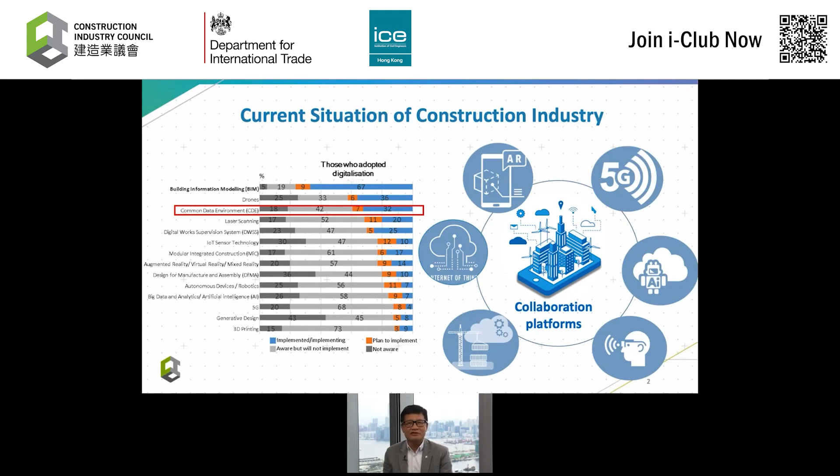The BIM and Technology Adoption Survey has been carried out recently, which shows that nearly half of the construction contracts are already implementing different digitalization tools and solutions. Last year, we set up the task force on construction digitalization to develop the construction digitalization roadmap. It facilitates industry stakeholders to understand the main focuses which set a path leading us to transform the construction industry as the backbone of a smart city.

Last year, CIC and ICE, with the support from DIT, co-organized a webinar on transforming the construction industry through innovations. We invited Sam Stacey, the Challenge Director, Transforming Construction at Innovate UK, to share with us his insight into how accelerating the development and commercialization of digital and manufacturing technologies can support a more efficient, highly skilled, and productive construction industry. The webinar received an overwhelming response from the industry.

This year, we keep our momentum on knowledge sharing, and also we collaborate again to organize today's webinar. In this webinar, we have invited Neil Thompson, Head of Construction Innovation Hub Program for the Center for Digital Built Britain and Director of Digital at Atkins, to deliver a keynote speech on the modern methods of construction and digital transformation in the UK construction industry.

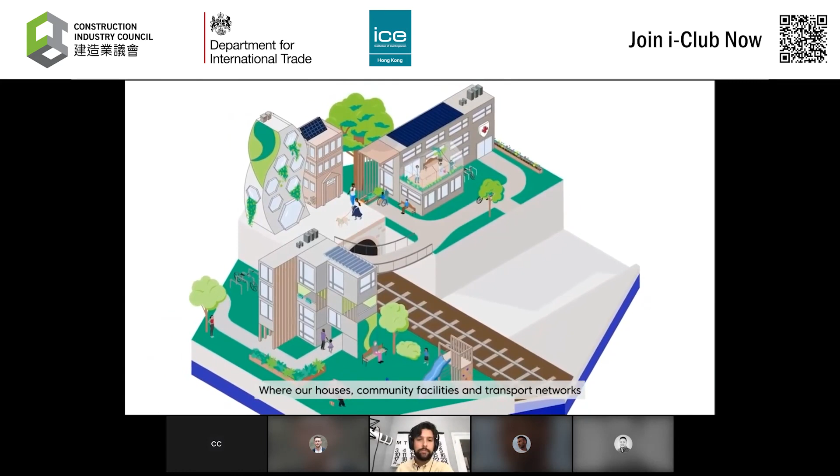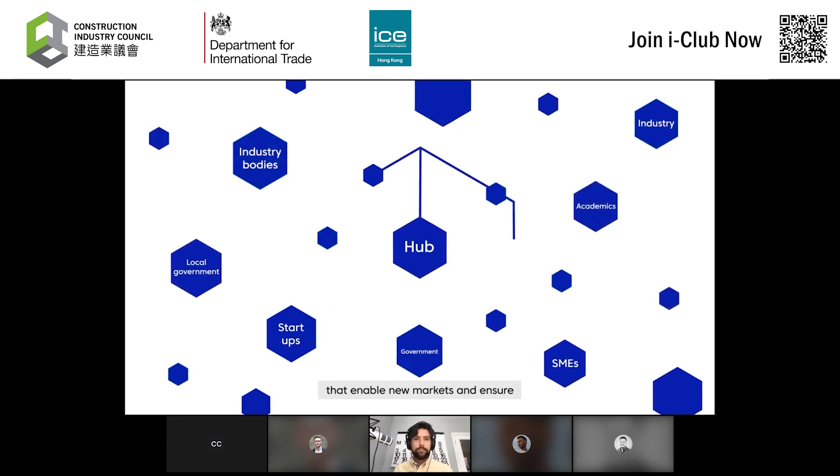The Construction Innovation Hub's vision is a world where our built environment helps society thrive, where our houses, community facilities and transport networks are more resilient, safer and net zero, and our infrastructure is smarter to perform better for users. In 2018, the Hub began a government-funded programme to transform the performance and productivity of the construction sector. We're working with over 100 partners to develop solutions that enable new markets and ensure our built environment is fit for the future.

Better decisions are driven by the Value Toolkit, a suite of tools and processes aligned with the government's construction playbook that empowers clients to engage with the supply chain about the outcomes they want and make value-based decisions about the right delivery model, commercial strategy and suppliers for projects, programs and portfolios.

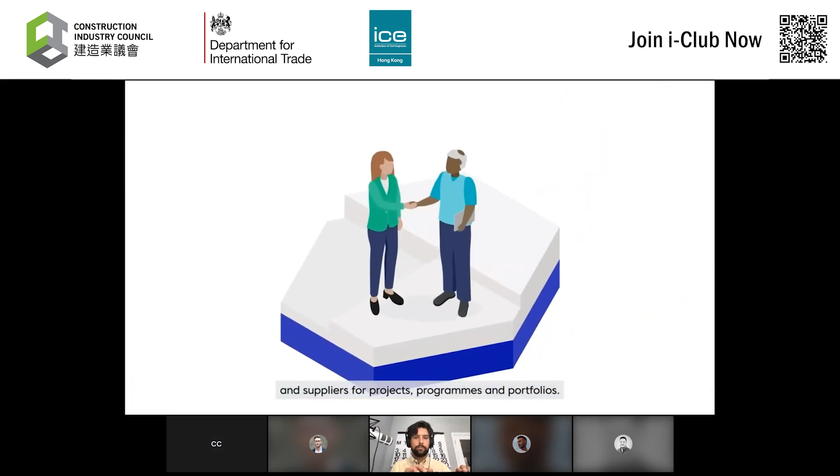The Hub is developing new digital tools and guidance for clients and the supply chain that drive efficiencies and realise the value of data, to help clients get their digital strategy right from the start. Project teams work more closely together, ensure a golden thread of asset information is curated through life, and generate insights from data to monitor and improve asset performance and compliance with evolving regulations.

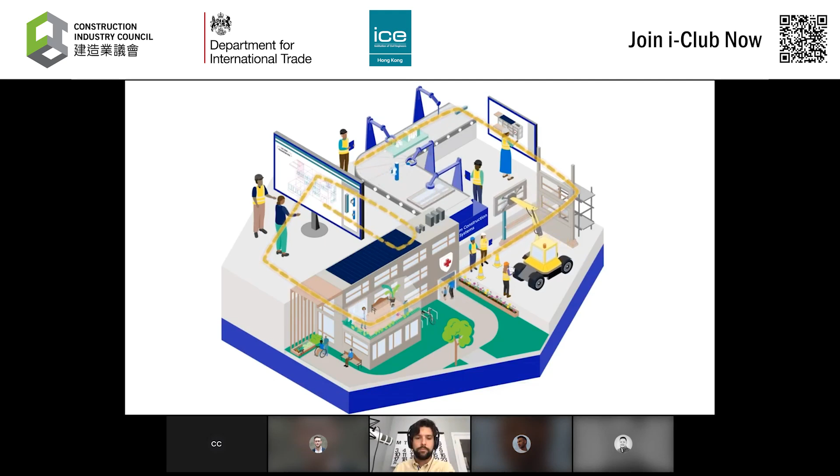We're supporting the next generation of digital twins that can be securely connected across organisational and sectoral boundaries.

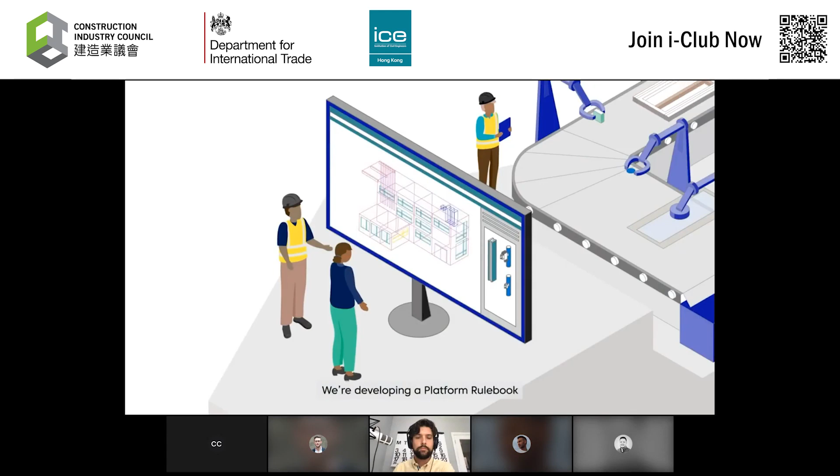The Hub Platform Design Programme is laying the foundation for a thriving UK market for platform construction systems. We're developing a platform rulebook to show how standardised kits of parts can produce a wide range of beautiful, high-performing buildings and spaces, and tools and guidance to ensure components and sub-assemblies are manufactured and assembled using processes that improve performance, safety, and productivity from factory to site.

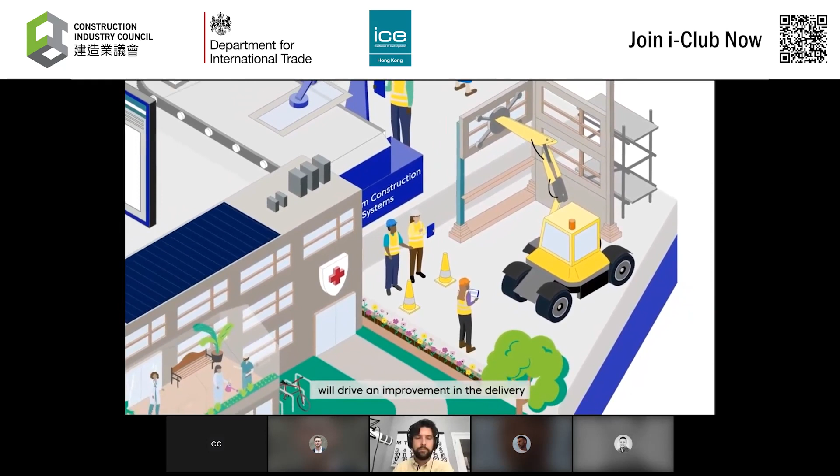Together, the Hub's programme will drive an improvement in the delivery and resilience of our infrastructure and a sustainable future for our construction sector. To grow demand, we have partnered with 5 government departments to identify a pipeline of projects that could be delivered using Hub outputs worth £35 billion over the next 5 years.

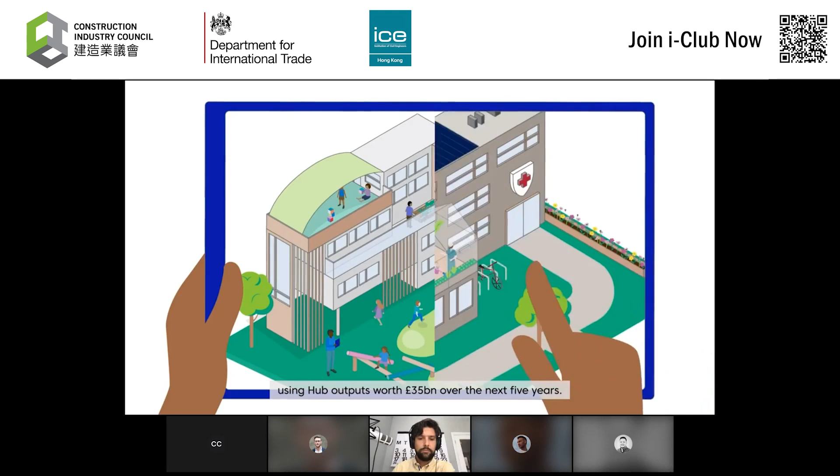Through collective innovation, we are accelerating change. By working together, we will get there faster. The decisions we make today will shape the future. Be part of the transformation.

So there we go, a broad introduction to the work that we do at the Construction Innovation Hub. And specifically, so in there we spoke about a golden thread. The golden thread is a stream that I lead, and that stream is all about creating a safe, sustainable and performing industry. There's some key things in terms of what that enables, and almost most critically is about...

The technical challenge for hitting net zero trajectories. We all have to work together to work out how our industry can contribute to the reduction of the impacts of climate change. And within that, it's also about assuring those products to ensure that the products are fit for purpose inside the supply chain, and we understand the performance of those.

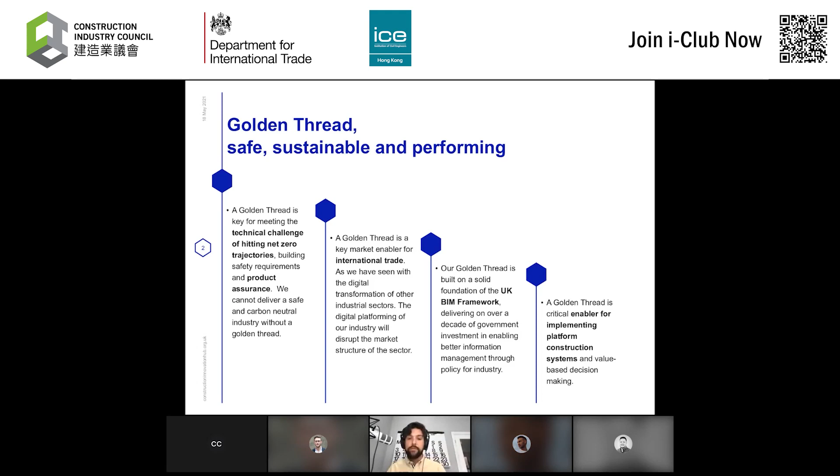So a little bit deeper into my work. Not going to go fully into this. I'm very happy to answer questions on this in the Q&A session, but the golden thread stream is about 6 work streams. One is around safety and assurance. How can we get and generate tools that enable people to generate data around the products, data around the organizational objectives, and connecting those together.

And that was about standards. So in the UK, we have the UK BIM framework, and how do we drive the adoption of that in industry? There's a stream around developing client maturity, so that's where we host working groups with key client organizations and industry to get them together to benchmark where they are today and map their journey to a coordinated and integrated digital future.

Also got this project around government soft landings. What that means is providing the tools to procurement teams that want to buy better outcomes for buildings from a carbon perspective, ensuring that the carbon emissions designed for the building are the carbon emissions that are actually happening when you switch this building on.

Next is the work we do with Cambridge University around digital twin demonstrators. We've run a series of demonstrators where we've connected certain types of asset to sensors and the internet, looking at the insights we get from buildings to bridges, and using satellite technology to track asset performance.

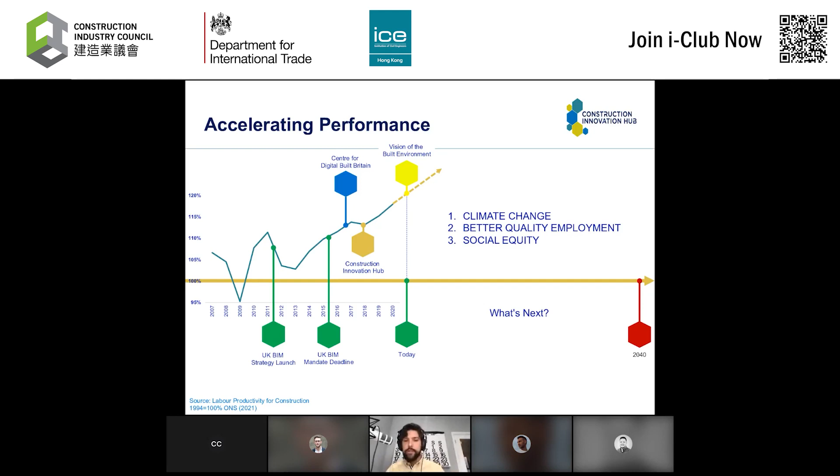But how are we going to go about doing that from a megatrends perspective? We're going to hear later on about the outcomes of these dynamics. We'll talk about the economics of technology, where the cost of storage, compute, and connecting data is reaching very low levels. That has enabled the cost of prediction to become very cheap. And on top of that, especially for our sectors, the cost of robotics has also reduced dramatically.

All these things coming together mean we have a very interesting opportunity from a construction innovation perspective. The input costs have reached a point where we can experiment in a risk-free way from a commercial perspective, but it also drives a business case and a business model that enables the use of these technologies.

But there are consequences. If we think about digital innovation in finance, for example, when we think about what's happening with Bitcoin, it's reached a point where Bitcoin itself is using as much electricity generation resources as a small country, but still a country, and it raises some questions. Just because the dynamics of technology mean we can do certain things, should we? How do we broaden the lens of innovation to include the outcomes of that?

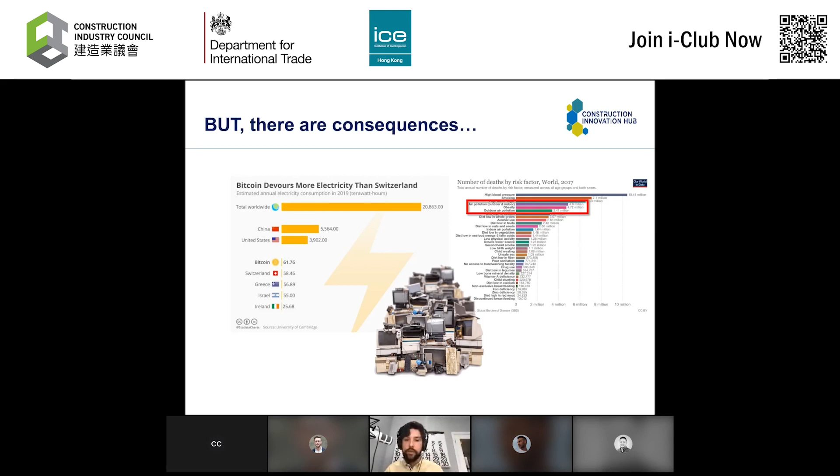If I'm asking you to give me the cheapest thing, then maybe I wouldn't worry so much about quality, about its running cost, about its impact on the environment. But if I'm asking you for the best thing, then you start thinking about the long-term impacts of this—what is the reputation aspect of the thing I'm delivering, what is the quality, and so on. I think the digital transformation that's driven consumer behaviors in retail will map over as we think about the tools presented next. These are going to be the tools that enable people to ask questions about being the best, not being the cheapest.

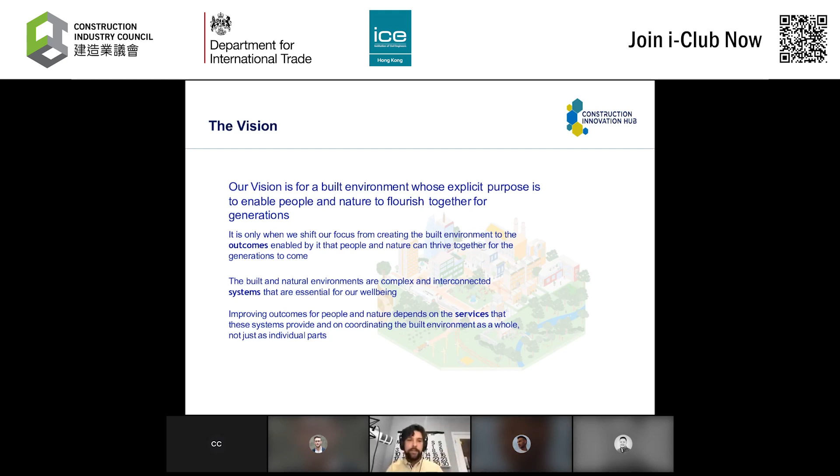We are serving a mode of transport. We are serving modes of well-being. We're serving modes of playing sports and modes of education, etc. And sharing these visions is key.

Now, key enablers of that are new skills and capability and more collaborative ways of working. We've seen the impact of the pandemic, how much digital tools have helped us change quickly to being locked down, for example. Sharing processes and information is really key, because information is locked in silos, locked in places where we can't gain the insight to create better quality decision making. It has to be done in partnerships, and those partnerships have to be across government, industry, academia, and ultimately the people that are going to use this, the people who will experience this every day, whose lives it's going to impact—being focused on the outcomes and designing appropriate and collaborative delivery models. This ties to the steps we need to make, and it's not a linear process.

It's cyclic in nature. We have to have that vision, the area of what's going to be the direction that we need to point to, to know that we're making good progress.

That then ties back into the policies that we need to make from a public sector perspective, to then drive strategy of procurement of people that buy construction services, but then also the people that respond to those procurements. The supply chain also needs to align its strategy. And finally, how we make action, and then learn from that, feed into the vision, and then we go back as a feedback loop.

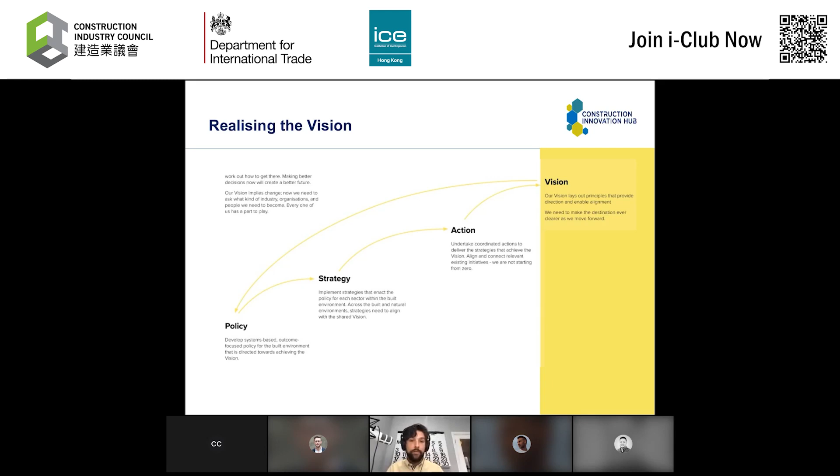And then, lastly, the built environment vision for the UK is available. It's on the internet. If you type in built environment vision UK into your search engine, you'll find it, or we'll share a link and get it to you. But this is what it's all about.

It's about connecting our built environment systems with the natural systems and ensuring that there is balance with those, and we're protecting nature and supporting what we need to do from the reduction of carbon emissions, for example, and those being wrapped together into services that enable us to deliver on the UN Sustainable Development Goals. And the vision is a first step to this is what we should be aiming for. Let's do that together.

And lastly, it's about that communication across different stakeholders. So enough of me. I will then hand you over to our speakers that are going to show you technology platforms that are using those dynamics that I presented to you previously and turning it into reality. Thank you.

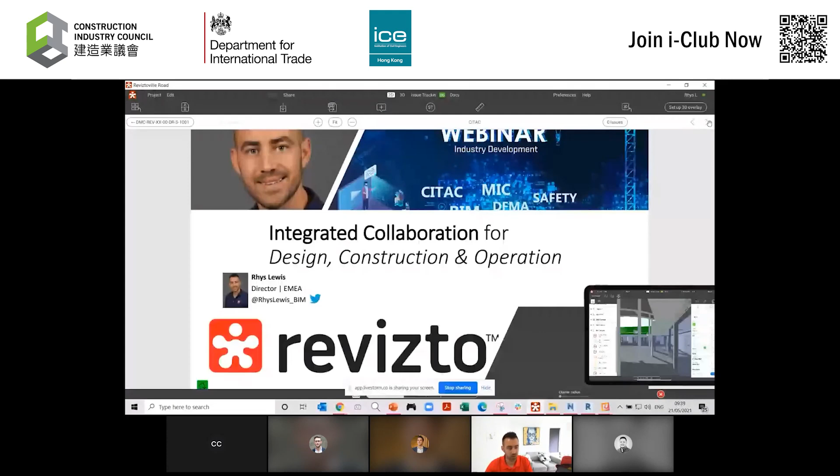So I'm actually in the Revizto application here, as you can see, and I'm just going to run through my slides. So like Neil and others on the call, I've been in industry for a little while now, just over 15 years. My current role is Director at Revizto, and I wear a side hat as well. So I'm involved with the UK BIM Alliance, and I chair the Wales community. And I really joined Revizto after leaving Arup because I saw a really exciting opportunity for us to help industry move forwards. And our goal and vision really was about bringing gaming technology to construction.

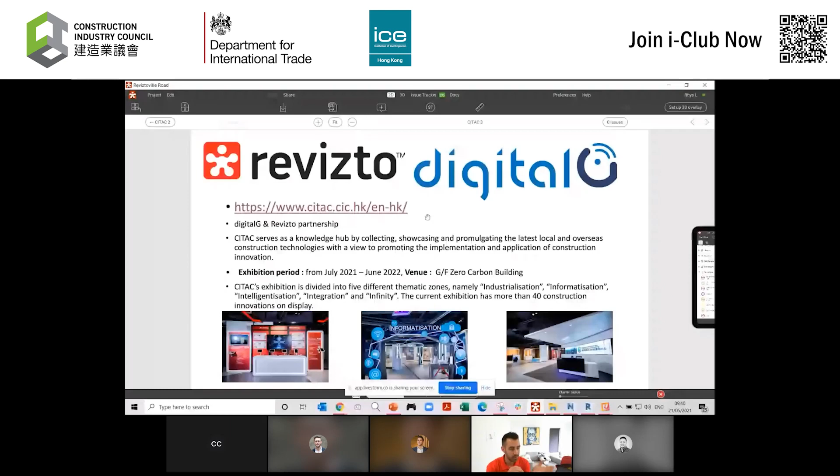Something else we've done that I wanted you all to be aware of: great news actually, we're a pre-approved product now as part of CITAC, working alongside digitalG locally. And I'm not too sure if everyone on this call is aware, but there'll be an exhibition starting as of July, where digitalG will be able to showcase some of the things you'll see today in Revizto. I'm hoping, just like some of the earlier remarks, that I can join you all in person, but if I can't, the team are there and available to talk to you all as well.

To tell you some of the things that many of our clients are doing using Revizto right across the world, actually, this is just a handful of some of the organizations using Revizto. Neil is working for Atkins and a number of other hats as well. So they're using Revizto on a number of different projects globally, Gammon Construction and many, many others. And you'll see why in a short while.

Really, and just one of the points that Neil touched on about engaging and sharing information with all stakeholders, that really is what we're trying to do: to break down the barriers, move away from the silos in communication across construction projects, and ideally have an integrated collaboration platform throughout the whole project life cycle.

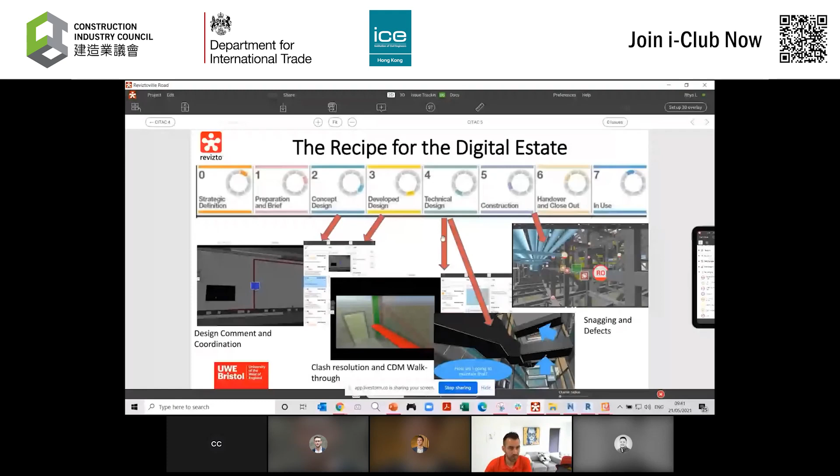So effectively, we end up with a digital estate that the asset owner can use, operate, and really take ownership of. Something that benefits everybody across the whole project life cycle.

So two things for me, really, as we jump into the technology: how can it be successful? My opinion is interoperability and usability. One of the things here I'm looking at is the many file formats and authoring tools that Revizto supports, including lots of popular authoring tools and standard industry exchange formats.

So if I actually jump into the 3D space here, we'll move from 2D to 3D, and this takes me to my home view. I'm actually in the Revizto application now, using my laptop, but I've got the same project and the same application on my tablet as well.

So that accessibility piece, what I'm saying there is anybody needs to be able to pick up the project to be able to communicate, which is what we're talking about today. I'll come back to the tablet in a little bit.

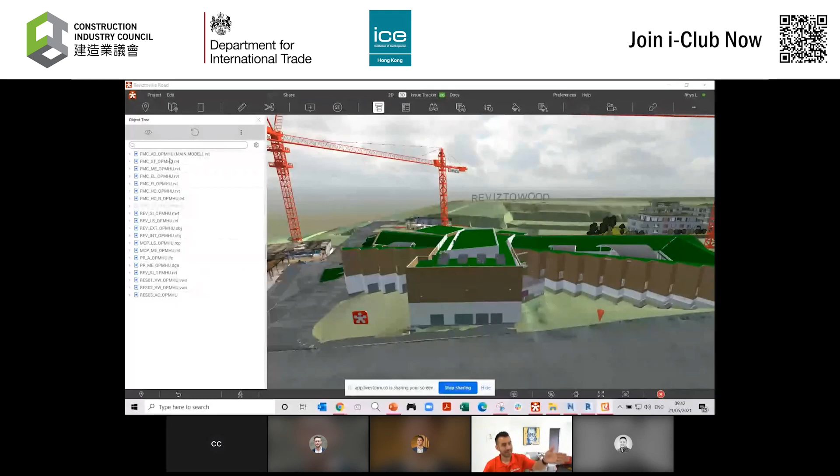Interoperability: on the left-hand side here in our object tree, we can start to see there are lots of different file formats. So we have Revit files here, we also have point clouds, we've got our 2D documentation, DGN, you name it - there's pretty much everything you can imagine here.

But if I just take a look over here and click on that wall teleport, let's just double click and see what we've got here. We've got an IFC, and within there, I just cut a section through. I believe if I just hover over any one of these objects, it'll start to give me the metadata associated with that object. All of this is from MicroStation.

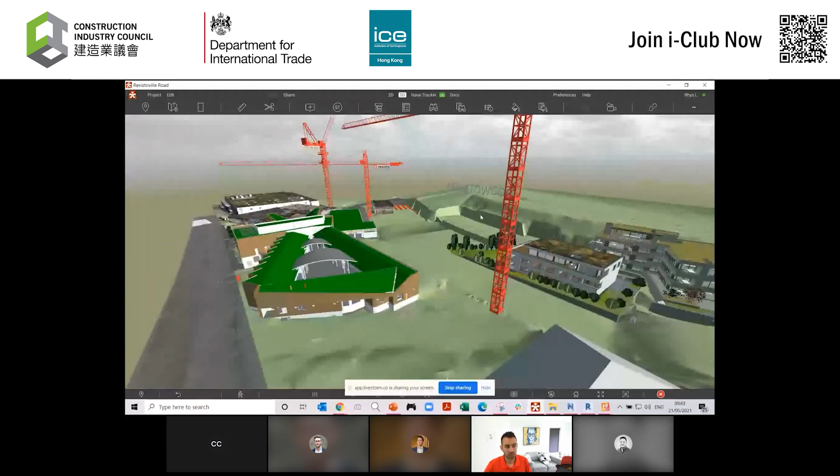So being able to firstly understand and give that information to anybody is very important. The second thing is being able to use that. So using gaming controls, I can really start to navigate through this project and start to ask questions to the project team about a variety of things. I'll come back to that in a little bit.

So we've moved from 2D to 3D. Let's jump to our issue tracker, where I've got a number of preset views here. Our issue tracker really is the core of Revizto. So I can start to filter and search a little bit like a Google search engine, shall we say, to find what I want quickly and easily, so I can start to make smarter decisions sooner.

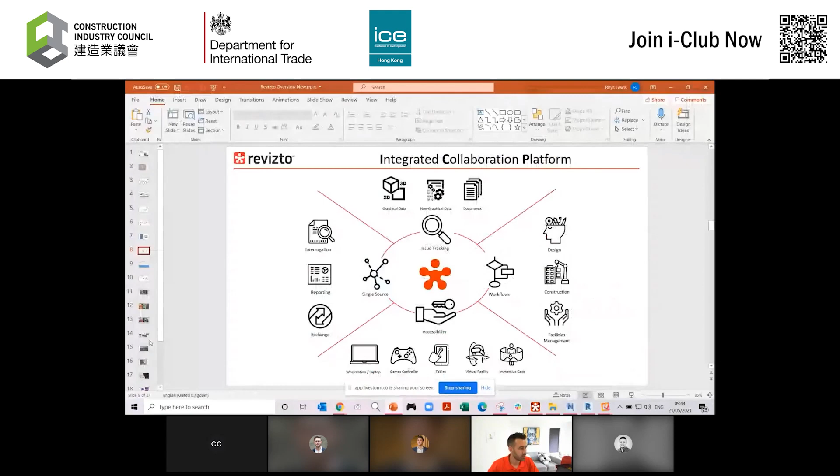So there are just over 4,000 issues here on our demo project. On the left-hand side, I've got some preset views where we've got a variety of various types of issues that we see our clients use. Coming back to one of the previous slides that I had here, this one is quite a good one - issues, I like to refer to these as activities, construction logs. There's a wide variety of use cases we're seeing our customers use Revizto for.

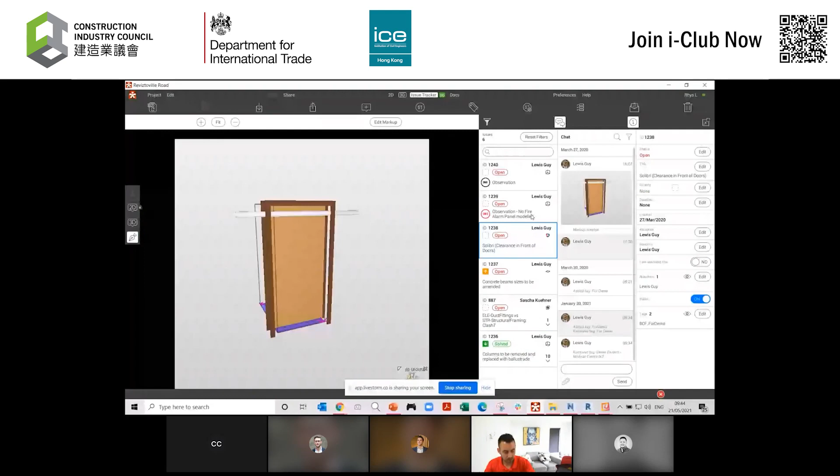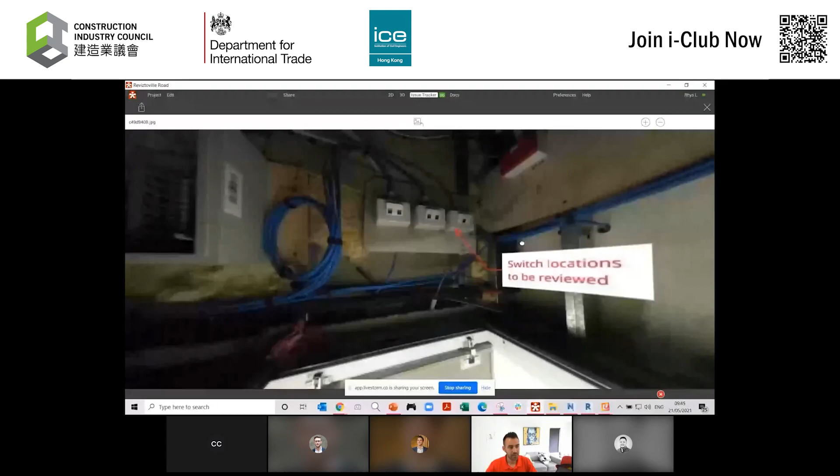So 2D review, you can do all of that in Revizto. 3D review, we can do that here as well. We've also brought in our clashes from a variety of clash detection tools - here we've got some clashes from Navisworks and Solibri, but also site inspection as well. So we can start to see, as the team are taking the project out on the site with a tablet, they can start to capture data in the field and verify if things have been built accurately. So as-built verification, and we can go a step further with that with reality capture, where we can now start to bring 360 images directly into Revizto.

So I have actually just created a preset view for CIC, and I think in here we've got a little graphic where I've added some of the things we've seen our customers use Revizto for.

So as an integrated collaboration platform, we want to allow you to share this information with all of the project stakeholders throughout the project lifecycle, as opposed to switching from 2D to 3D, from one process or one technology to another. Wouldn't it be nice if we could have a platform that will allow us to communicate in a common language for as long as possible, and ideally through into operation?

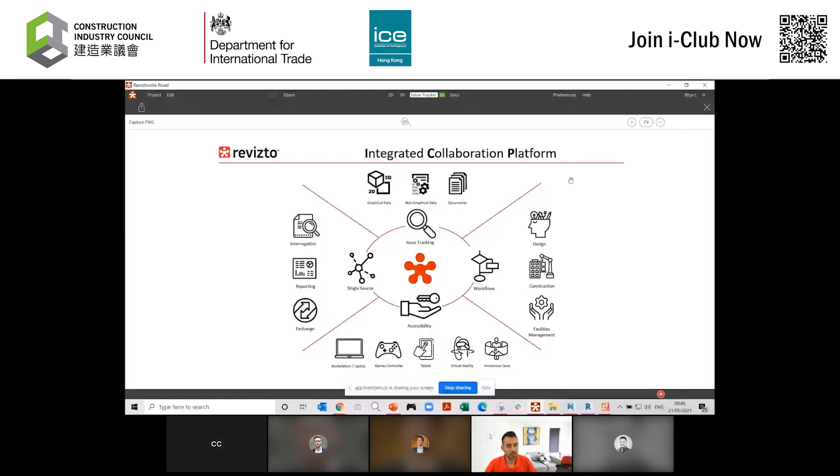So with that, I'll just start looking at creating some issues here in the application itself.

So if I take a look at any one of our floor plans, let's take a look here in 2D. An important thing to understand about Revizto is the 2D information and the 3D information are tightly connected. What I mean by that is this green icon here - we've pushed all of our drawings and models in via a BIM authoring tool, such as Revit, Tekla, or MicroStation.

Because we've brought the models and the drawings from these applications, this green icon now really allows me to do some interesting things with the project itself. I can start to really understand, communicate, and coordinate between two different sets of data here. We've got our 2D information and also our 3D information connected in a way that can really help me understand if this is actually going to work in the construction field, and engage other stakeholders that may not be competent with 3D modeling tools. So this really is a powerful way to help communicate, coordinate, and collaborate on projects.

So this could be a 2D document as a PDF that we're overlaying on a point cloud. I think I've got an example of that to share with you as well.

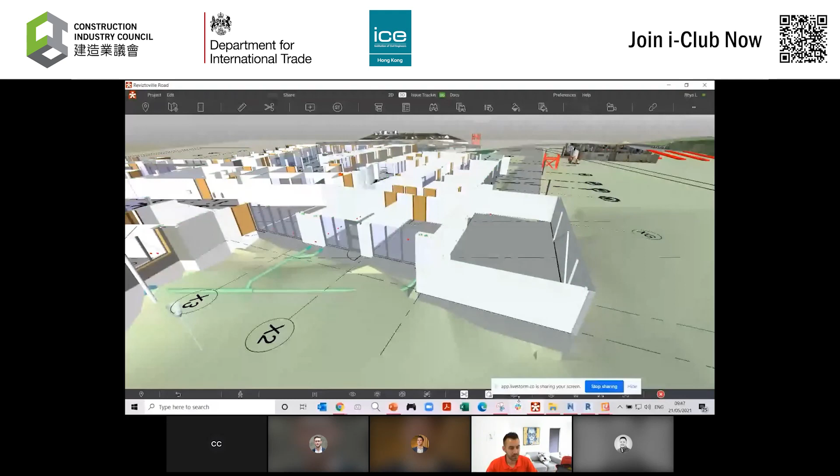So let's do that. Over here, we've got some reality capture data. Again, just using the gaming controls, I can start to navigate through. I believe in this plant room we've got 3 sets of data. So now I can see a combined set of point cloud data that's been brought in directly through Revizto. All of this is now running in real time on my machine - I've not had to stream this information.

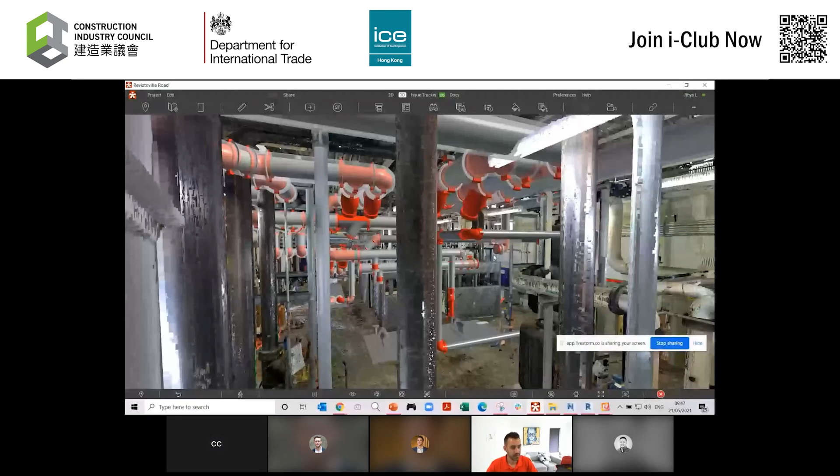I can select - let's make this look a bit better. We can take that, understand all of the object data there that I've selected, and coming back to the point I referenced, if we come back to the mechanical plant room here where we have some drawings - let's go with this one here. Select that green icon again, and that's now going to overlay that drawing here. So we can start to do lots of interesting things here. This can really help with design intent, but we can start to verify as-built information as well. So a really, really powerful tool that we can put into the hands of anybody.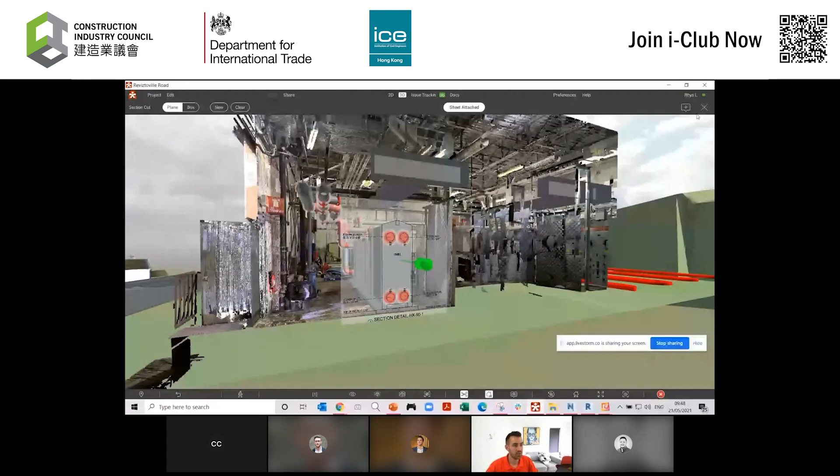So now let's move to how we can manage and create issues in the project or activities. I've started - what I've done here before we spoke - is created a preset issue stamp for CIC, and you can see I've started to place these around the project on drawings and models. I've attached some images. All of this is being reported through a web dashboard in real time, so I now have a holistic view of all project information and progress throughout the whole life cycle.

This is looking mainly during the design and construction process. So in here I've got clashes, a design review, and at the top we've got a high-level overview of the issues that we're creating in today's review session. So let's start to do that.

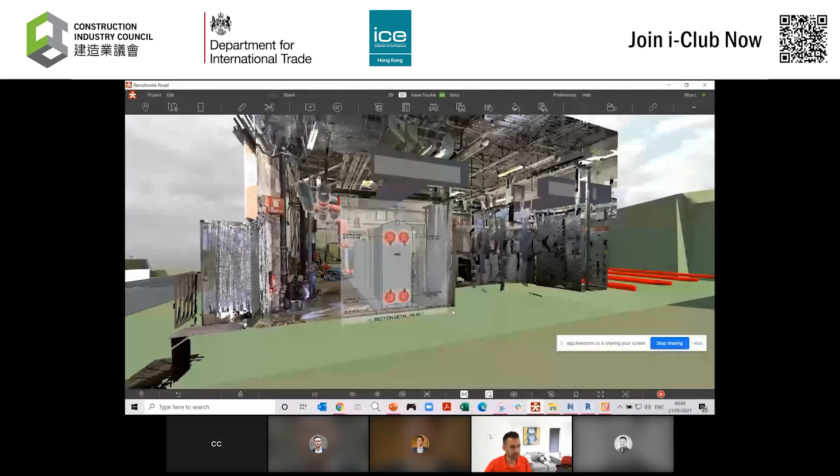So I can click on 3D, let's select home here, and we can start to use a number of tools across the top. I'm just going to click our room option there - that will take me into the center of that room where I can start to take measurements. I can cut sections. There's a variety of measurement tools, but let's just imagine, actually, let's cut a section through there.

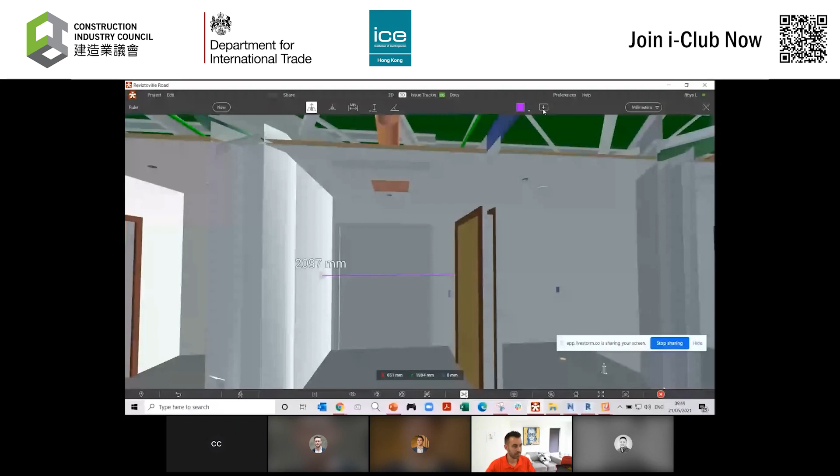And we'll take a measurement as well. And for whatever reason, this needs to be wider. So I can now pick my issue here. We've created the CIC predefined stamp that I mentioned - I can pick and place that here. And now that gets logged in our issue tracker. Now what's happened here is that has been logged in the issue tracker in our golden thread, our single source of truth, where all of our project information is stored.

So this has actually been assigned to my colleague, Lewis, who's in a different part of the world to myself. Let me just let him know I'm here. And he can now start to communicate with me in real time. We can attach lots of information to that issue. So I can come in here and say, hey Lewis, please review. And he can then comment back and forth and change status and lots of other creative things here.

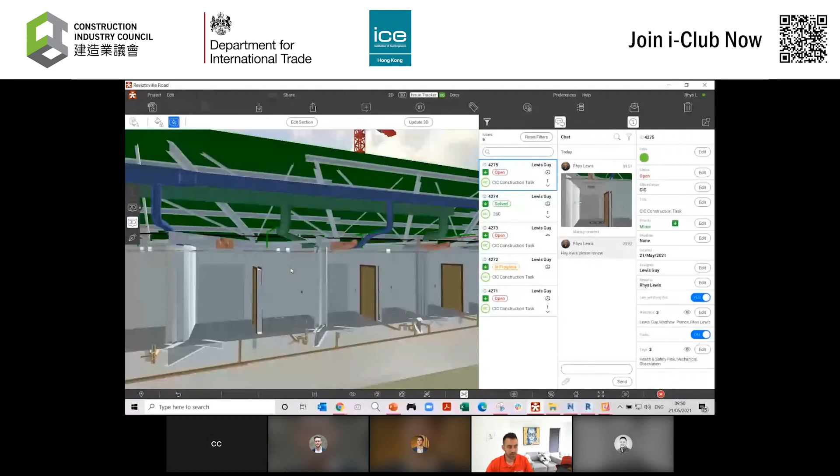Now, where we've positioned that issue is intelligent. So if I click on 3D, it now understands where it is in the federated 3D space, but it also understands, because of that XYZ coordinate, where that issue affects any of our 2D documentation.

I can now see Lewis has come online, so he's left a comment saying he'll get onto the team now, and he's changed the status to in progress. If I come back to my dashboards and refresh, we'll start to see the issues populated here in our CIC preset update.

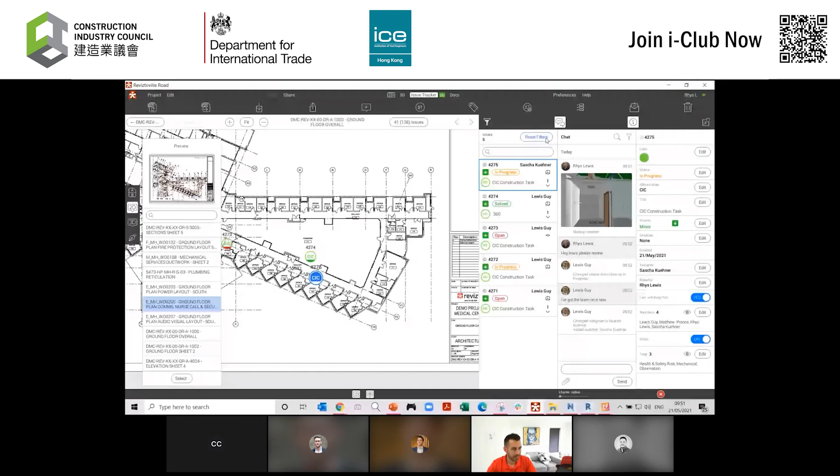Now, I mentioned filtering through our issue tracker a bit like a Google search analogy. If I come back to 3D, something new we've added to Revizto is a number of tools across the top here where we can start to filter and search in our project based on the metadata associated with these models.

So if I click 'door' and right click, that's identified where all of those doors, or any object where the name door is referenced, are located. Right click, and there's a number of things we can do. Let's isolate those with transparency for now. There are all the doors in that project.

I can come down here again, pick our automated issue creation tool, pick and place. And again, that's logged the issue in our issue tracker, and Lewis can go and deal with that.

So the third thing, this is really empowering. I mentioned some stakeholders aren't digital technical users of these tools. We can now search for 3D object data and understand where that is on our 2D documentation. This is a really powerful new way to act as a bridge to BIM for people not used to using these authoring tools.

What I'm going to do now, with probably a few moments left, is do that exact same piece of work on my tablet. I can connect using my tablet. We support a wide range of devices, but everything's synced in real time. An important thing to mention is connectivity shouldn't really affect productivity, so on my tablet I can work offline.

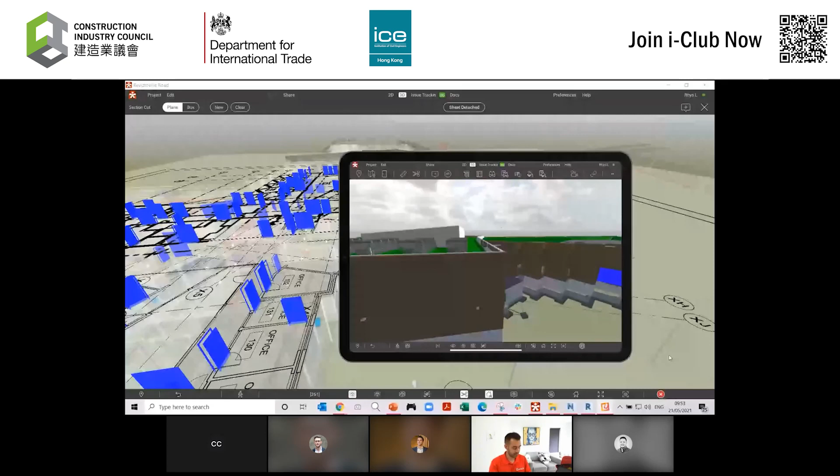Something else we've included here is the appearance template. I can come in and there are some predefined templates. One looks at the status on site of how concrete is being poured, and all of this is color coded by status. Green has been completed, amber is in progress, red will be done soon, hopefully.

But what I wanted to show you is our template for design review, based on the MEP system. So I can start to come into the project here, and when I spot things that aren't quite right that need to change, again on the tablet it's the exact same process. I pick from my predefined list, pick and place, and that's now logged that issue in our issue tracker for me to communicate.

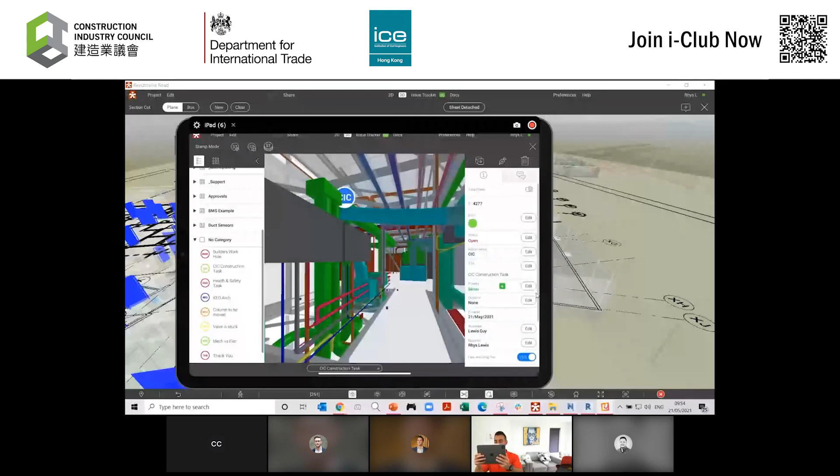I can grab my tablet if I'm out on site, a bit of Revizto inception for you there. There we go, smile please. That image has now been logged into the issue tracker, and then we can start to spin out a variety of reports for the project team.

So let's put that back there. We'll come back to the application itself and settle down.

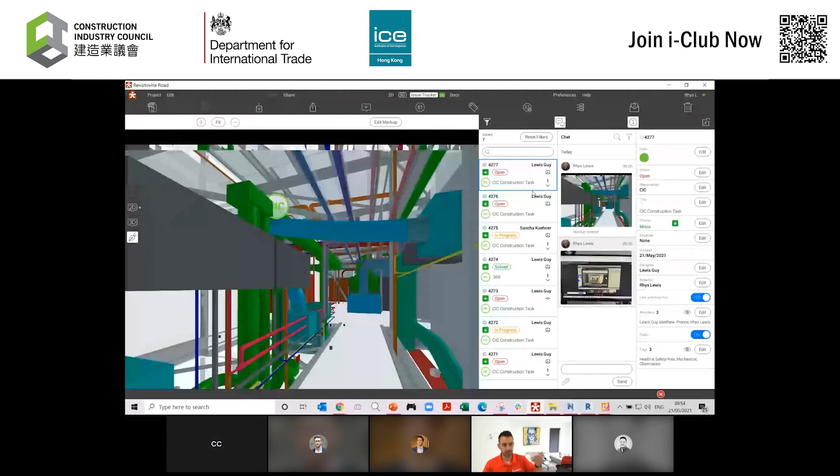One thing I wanted to finish on, if I come back to the issue tracker, is how the 2D information and the 3D information is all connected. We can communicate with our colleagues in real time, and all of this is reported through live dashboards that we can view on our mobile devices, let's say through a web browser.

The important thing to mention is when we need to go and update the models themselves, let's show you how that works. So I'm going to select Revit here, click on the issue tracker. These are now synchronized.

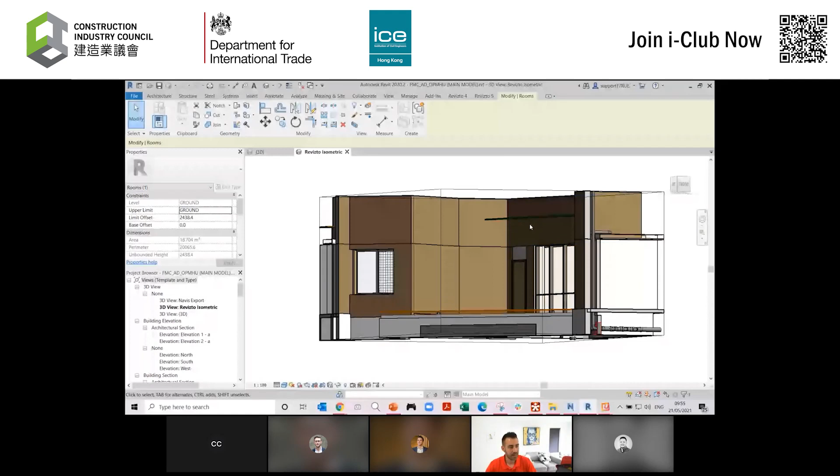Let's say I've assigned this task to a project colleague in another part of the world. They can now pick up this issue and need to go change or update their model. I've just double clicked on the issue, and that's taken me directly to my Revit file with the section box cut. Let me come back and look at a clash, for example, with some of the architectural doors. That will now show me all of those clashes.

Double click, and that will take me directly to that area with a section box cut. Again, because of the XYZ coordinate that we're based on, I can see exactly where that clash is in 3D, but it'll now also tell me what drawings are affected by that clash. So something that a lot of our contractor clients are using is now the ability to go through their projects level by level in 2D and understand where their clashes are. And that works with 2D switchback and 3D switchback, and through a variety of tools that we support.

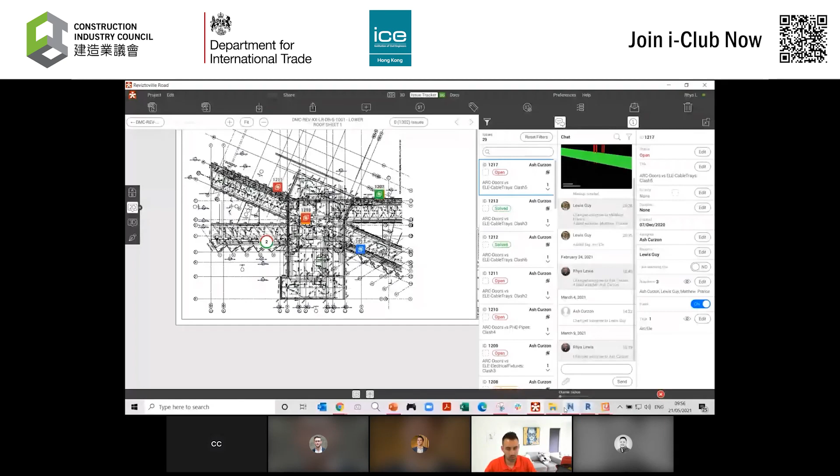So I'm shy on time today, so I think I'll just stop there. Let me pull up, I think our details will be shared with you all afterwards, but we do offer the ability for you to test and trial Revizto for yourself. It's been a really exciting journey for us, and I really hope this session is useful for you all that are watching today. So I'll stop there. I hope I'm on time, and hand over to the next speaker. Thank you.

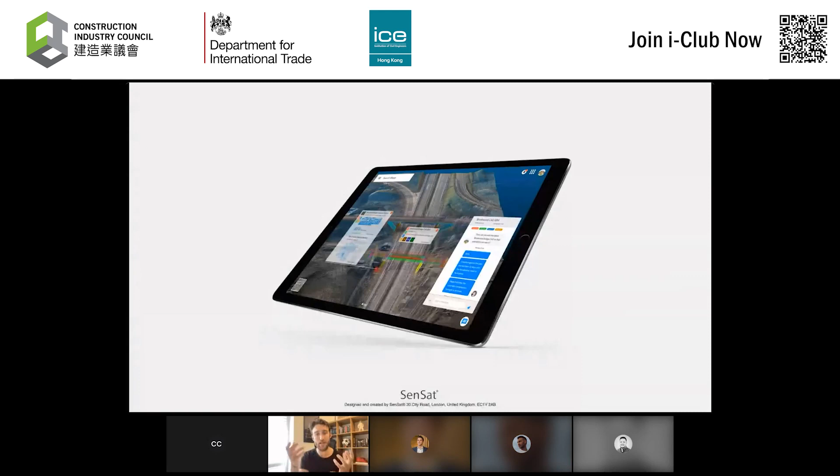So from 2018, we then decided to distinguish our two business offerings. So there's two real services to what we provide that paints a picture of what we now call a common visualization environment. The first is data, and there's a number of different data sets out there today. Data typically is either owned in its entirety by the asset owner, or data that's captured by ourselves, or data that's captured by your supply chain.

What then happens with that data, about bringing it to life, is the environment that we've then created, essentially the platform. So when I'm talking about data, in the first instance it was point cloud data that then moved to things like 2D orthomosaic imagery, that then moved to CAD and then 3D modeling, and then finding an environment to bring that all to life and really democratizing that data set across an asset lifecycle. So going from the asset owner through to the engineering consultancy, through to the general contractor, finding value all the way along.

Essentially, why we built this is because there's three key areas which we call the information lag that we feel is a major part of why civil infrastructure projects are over budget. So information is slow to collect. The example I gave in a very manual fashion is if I'm doing topographical surveys, I'm manually having to go out to site and capture that data. If I'm asking somebody to measure the area of a roof, I might have to get them to put scaffolding around a building, get permits, and then go up onto that roof and manually conduct a survey. Once that data is then captured, information is often siloed.

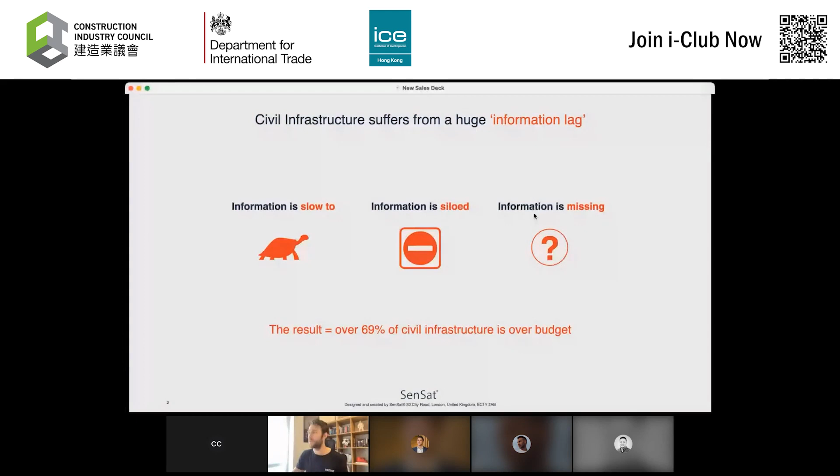Then information tends to go missing. So once I have all of this great information, I can then get that lost. And then there's rework and resurveys, which means if I bring all of those things together, that creates a huge information lag. So at Sensat, we really want to change that process.

We want to allow computers to be able to understand the real world that we live in, but start to automate some of these processes. So by using technology, we can capture data exponentially faster, using new data capture methods like drone technology, but also having a platform to be able to conduct some of this analysis, to be able to conduct those measurements that I mentioned, makes those things exponentially faster.

Making it available in a cloud-based platform that's accessible to anybody on a project, that's easy and intuitive to use, again makes those things exponentially faster, and making sure it's usable. So data sets that really can be brought to life through a very simple way to then have the conduction of those measurements or calculation or visual analysis to anybody on a project means that essentially we can then start to do some interesting things.

So today, we've predominantly worked in the UK, and as I said, where we are now as a business is probably still coming out of that startup era. In 2018, we really went to market with our proposition of data plus platform, and that saw us win 40 tier 1 AEC companies, predominantly in the UK and some outside of the UK, working on schemes like HS2.

HS2 is the high-speed network between London and Manchester, a couple of 100 kilometers linear, bringing that data set to life across the asset lifecycle. Working on schemes like the Heathrow expansion program, which is a big international airport in London.

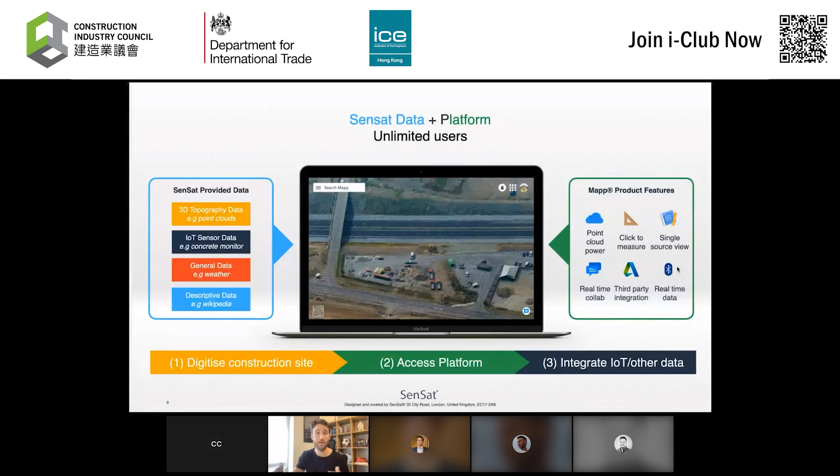We've then built in a number of different tools that allow you to do things like earthwork calculations, as an example, which is a very quick, easy tool that allows you to start to quantify things that are going on site. So what I'll do now is I'm just going to switch screens and just bring the platform to life for you guys. So if, again, I can get someone to just give me a nod when you can see the platform screen.

Can you see that? Yeah, that's okay. Thanks, Reece, you're my man on this.

I appreciate that. So what you're looking at here is some point cloud data from a site that we captured. This is Perry Barr, the Commonwealth Games Village being built in the UK. As you can start to see this bring to life, this site's probably about 2 kilometers squared, so not a huge site, but fairly sizable.

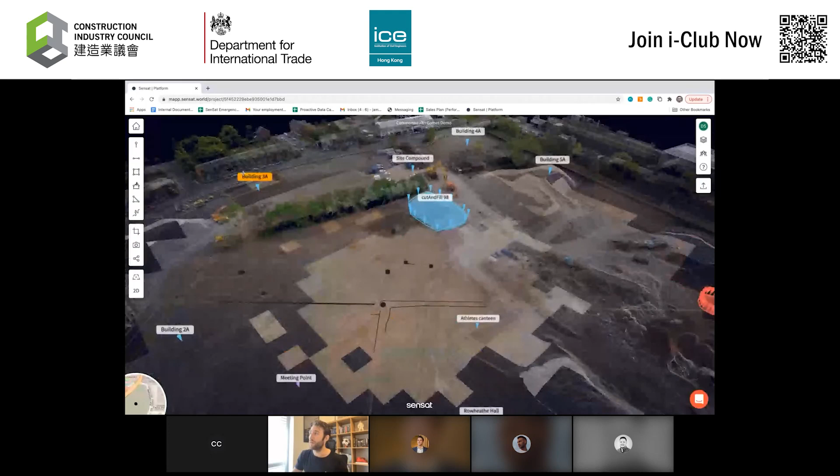What I'm able to do here is just zoom in and out and start to engage with my construction site. You'll see there's a number of different messaging on here: site, compound, cut and fill, building analysis. If I just zoom out, you can start to see some other aspects here on the left-hand side.

So what you're actually looking at here is a number of different data sets. To bring that to life a little bit, I'm just going to take the point cloud survey and reduce the opacity of it so you can start to see the underground drainage models. Now we're able to see the above ground and the below ground in the same place at the same time.

On the left-hand side, we've also got the exterior walls of the building, so we're able to start to put this into context of where it might be on the actual site itself. Things like this become really powerful because then I can start to make really informed decisions, not just based on my design data, but actually putting that in a contextualized environment.

Working with asset owners to engineering consultancies right through to general contractors, all working from this same hymn sheet. So the underground models that I've shown are actually a number of different aspects: we've got the water mains, the sewage mains, the gas mains, the fiber cables coming through here.

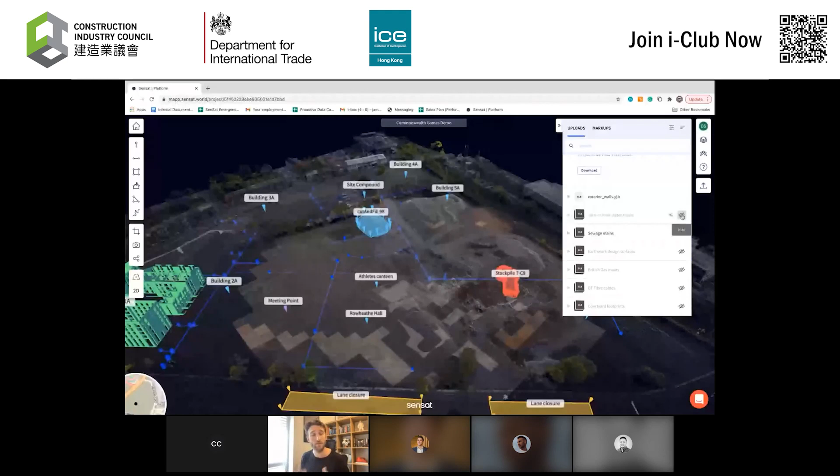And I'm able to kind of toggle these on and off, and as I toggle these on and off, you'll start to see them being removed from the model. Again, what I can do is take the real life data, the design data, and merge the two, and then start to do things like progress monitoring to see how I'm doing against the design plans that are in there.

Now, I mentioned a couple of the engineering tools or engineering grade tools that we can use, but they're also useful for other aspects as well. We've got an annotation tool, which is incredibly useful if I want to add additional data into my model. So what I've just done is I've chosen a point on site, which has given me my XYZ coordinates.

Really powerful if I'm working on a big scheme. Actually, I want to highlight a specific point. It might be an access point, it might actually be for things like health and safety tracking. I might want to report an incident, create an annotation here, and upload files to then create a fly-to point, so I've got an immutable record.

Again, something was mentioned earlier, a golden thread of activity that's going on. This will give me a timestamp of when it's created, and I can add a description to what's going on here. So this could be a health and safety message, this could be a delivery message, but it could also be something like permissions, because I'm able to attach PDF files, Excel files, certifications, whatever it might be, onto that point, which means that I know exactly what's going on at any given time.

I'm just going to delete that to make sure that this stays relatively clean. I've then got a line measurement tool, which I can quickly make that calculation. As I said to you earlier, as the example, if I asked you to calculate the area of a roof or the length of a road, you'd have to manually go there.

Now, one of the things that we saw last year with COVID is the rise of remote working, and having tools like this is really powerful to allow you to do some of those simple calculations that you would typically have to do on site from the comfort of your own home, but in a far more accurate way. Because as I say, if we start to layer in this information, it then starts to remove human error.

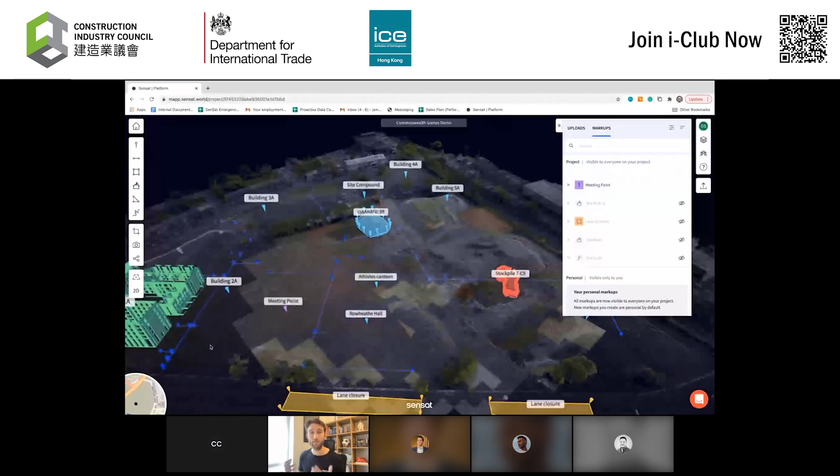That can be done one of two ways - through a manual process via file formats, or through direct API integration. That might be with your existing common data environments, project management software, or BIM software, and it will grow and scale with that software business and with your project lifecycle. Now, just briefly, I'll come into the 2D environment because that's equally important.

There are a number of use cases here, from asset inspection all the way through to similar kinds of logistics management. I've got the basic tools on the left-hand side - annotations, line and zoning measurement tools as well. So there are a few different use cases that come from this.

As you can start to see, I'm building a picture of my site that walks towards that digital twin environment, with a number of different use cases that can come from it. So what Sensat is leaning towards is what we call the common visualization environment - the lens through which we believe construction companies, asset owners and engineering consultancies should start to look at things, giving us that golden thread from site activity.

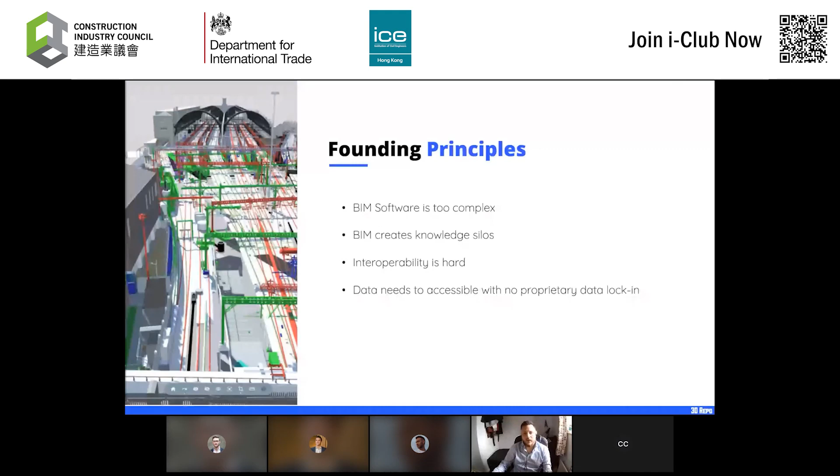If you're working in a platform that stores things in its own proprietary format, you're going to end up in a world of hurt as your project starts to progress, especially as you move into asset management. So wherever we take any data into 3D Repo, we open it up and store it as open data in the database, so you always have access to it and can move and use it however you need to.

And finally, we realize every project's different, so we're a great believer in open collaboration and APIs. If you're working with a platform that doesn't have an API, you're locking yourself into a particular workflow of that vendor and not allowing yourself to connect in with the wider world.

So the 3D Repo platform itself ingests 3D models and BIM data from all of your major providers. We put them up in the cloud, break them down, and store them in an open database. So every object within your BIM model, every piece of data within it, is stored in an open and accessible database in the cloud.

We then serve this up to our users through a number of products on our platform. The first and flagship product, the one I'll be talking about mainly today, is 3D Repo IO. This is our platform for federating models together and running your normal clash and change detection. We've got all of the issue tracking built in. You can run automated data validation on the models as they come in, based on rules that you've set up. You can integrate it with GIS data.

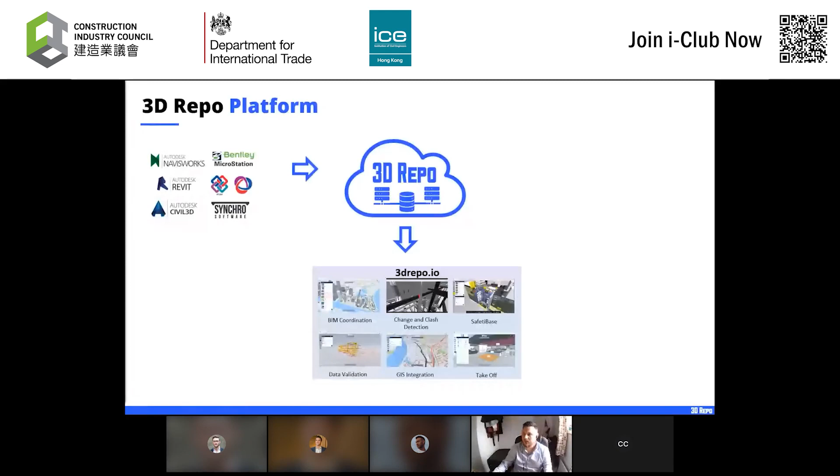And the thing I'll be talking about mostly today is our SafetiBase feature, which is our 1192 Part 6 compliant register for managing your health and safety data within a BIM environment.

We also have another product called Plan-Base. This allows you to pull those same models into a public-facing forum for use in public consultation, allowing the general public to see your schemes and feedback on them before you get planning consent.

And finally we have a free product called 3D Send, which anyone's free to use. You go to 3dsend.com and it kind of works like a WeTransfer for sending 3D models, but you can also view those models live within a web browser without needing to download or purchase software such as Revit or Navisworks.

And finally, anything you put into 3D Repo can also be pulled down into live game engines. So for anyone creating digital twins within tools such as Unity and Unreal, 3D Repo offers a really streamlined pipeline for that management, so your digital twin applications constantly update every time the 3D Repo database is updated by your users.

And all of this is underpinned by our open API, which allows us to connect to any product that has an API as well. These connections - these are just some of them we have at the moment - vary in complexity, from published applications on the Autodesk App Store for Navisworks and Revit, through to where we've taken the Synchro format and embedded it into our product.

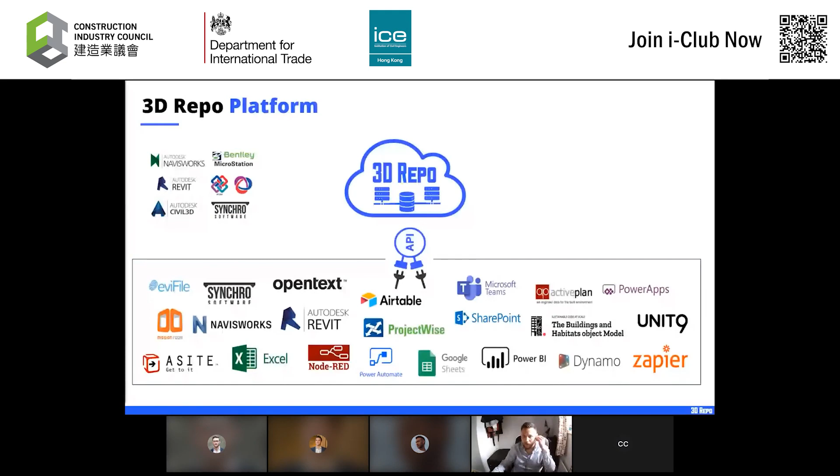And then much simpler ones, where you can pull your data as you want from 3D Repo into custom dashboards in things like Power BI, or even pull your data down into things like Google Sheets.

In terms of data consumption, you can upload models through plugins - that's fine, we have plugins for all the major Autodesk tools. You can directly upload a lot of formats as well, so if you don't have access to Revit or Bentley MicroStation, you can just upload the file directly to 3D Repo and we can understand it.

But the bit we're really excited about, and working on the most, is our connections to CDEs. Because we believe that without a connection to your common data environment, any model collaboration platform is just breaking your ISO 19650 way of working. So if we're following a true BIM collaboration platform, we need that common data environment with the full approved work-in-progress-archived process, which we don't have in 3D Repo, but it already exists on your project in your common data environment. So we believe in connecting there and getting all the data from that one central place.

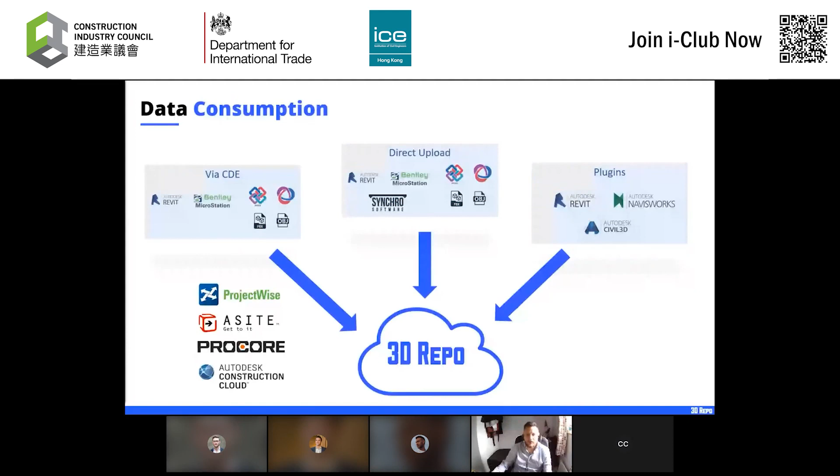And these are the companies that we're working with so far. Others are coming on board soon.

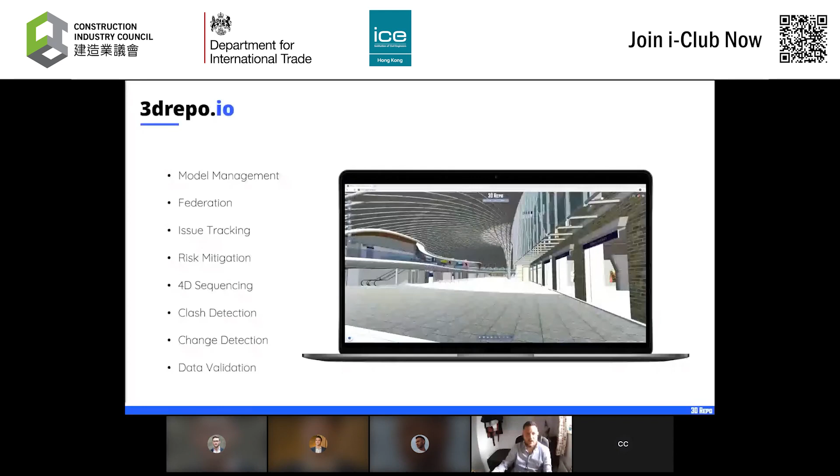So this is 3D Repo. When you log in, you can run around models, federate them together, and run lots of different processes around model federation and issue tracking, risk mitigation. 4D sequencing is one of the things I'll be showing you a bit later on, and the data validation stuff that I spoke about earlier.

In terms of our customers, a lot of the same customers as everyone else has mentioned so far. I guess people are using multi-platform, which is great. But yeah, it tends to be tier one contractors and multidisciplinary consultants.

One of the things I don't think we've spoken about too much today is security, which we take very seriously at 3D Repo, especially when we're talking about cloud-based platforms. So 3D Repo is an approved UK supplier. We have ISO 9001, 27001, and the platform's fully developed in the UK, in London, and all data is encrypted, whether it's at rest or when it's being transferred to you. So it has the same security as internet banking levels of security.

In terms of hosting, we also believe that your data should be hosted wherever you need it to be. So our main version that you can sign up and use today is hosted in London. There's a separate instance in Montreal for our North American customers. But we can spin up 3D Repo as a private instance on any of the major cloud suppliers as well. So if you do have a particular requirement about where your data needs to be, that's possible. And it is even available as an on-premise solution if that's something that your project really requires.

So up next, a bit of an exciting announcement for us today. This is today's news, fresh off the press today, and there will be some press releases going out later. But we have just signed a strategic partnership with Gammon and Digital G. This is to cover the promotion and distribution of 3D Repo for Hong Kong, Singapore, and Macau regions, but also covering a lot of collaborative R&D. So over the past 18 months of working with Gammon, we've done lots of research into possible integrations, one of which we're showing here on the screen with Motive Force.

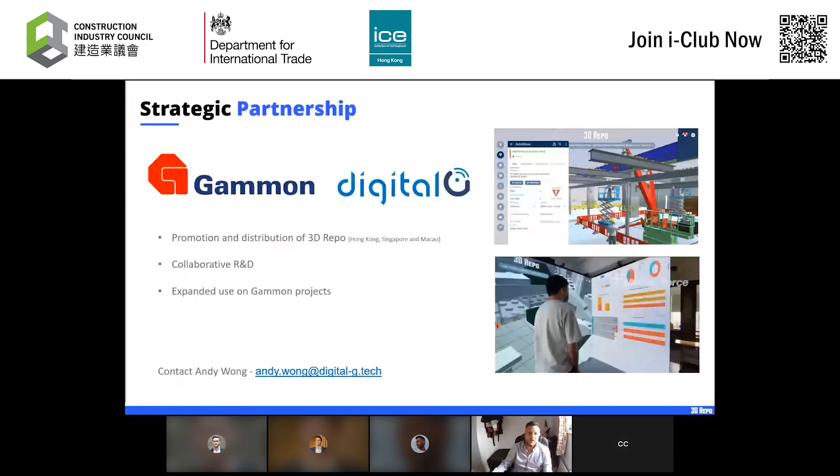So on to the product. I don't want to go through too much today, going deep into every single feature, but I want to concentrate on one. So that's our SafetiBase feature. This has been developed in the UK in partnership with a number of organisations, including Mott MacDonald, Atkins, HS2, Costain and Balfour Beatty.

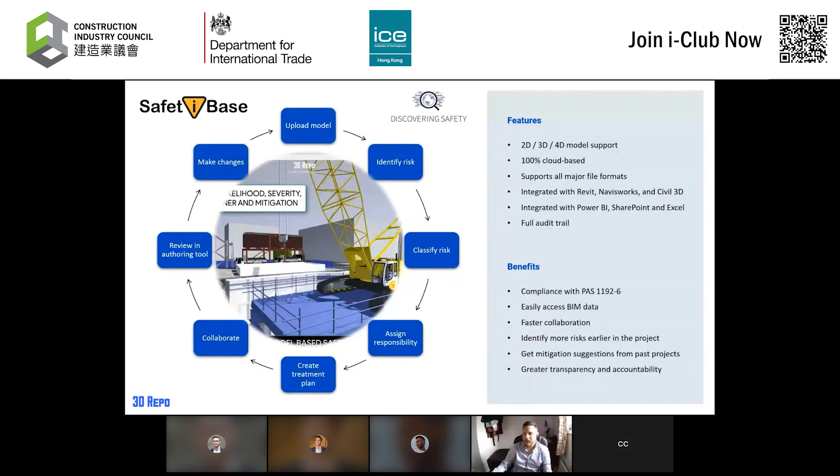And this is a tool for managing your health and safety data within a BIM environment. So it allows users collaborative access to your BIM models, where they can upload and identify risks, classify those risks based on the PAS 1192 Part 6 standard, which will soon be part of the ISO 19650 suite. Assign that responsibility to someone on the project, then link into our treatment plans from the Health and Safety Executive in the UK that are constantly being added to by our users and by the HSE to get approved plans of how to deal with risk.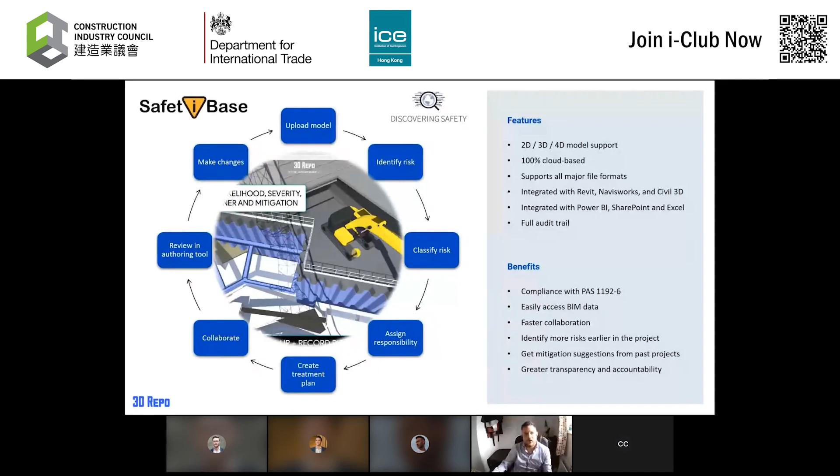And then, like with anything within 3D Repo, it allows you to collaborate, discuss, and find the best solution, whilst also linking back to the authoring tool, as many others have shown today, to be able to view that information within Revit or Navisworks, make the changes and re-upload the model. So this was a great process, and this is something that's been out for about a year now, so it's not too new, but very much focused on design stage, I guess.

So here, as we load up the model, you can see this is now a Synchro model coming directly from there. We can navigate around, as you'd expect, but now we've got it more in a construction phase. So we can see here a lot of the temporary works is included, but this again is still looking at a snapshot in time.

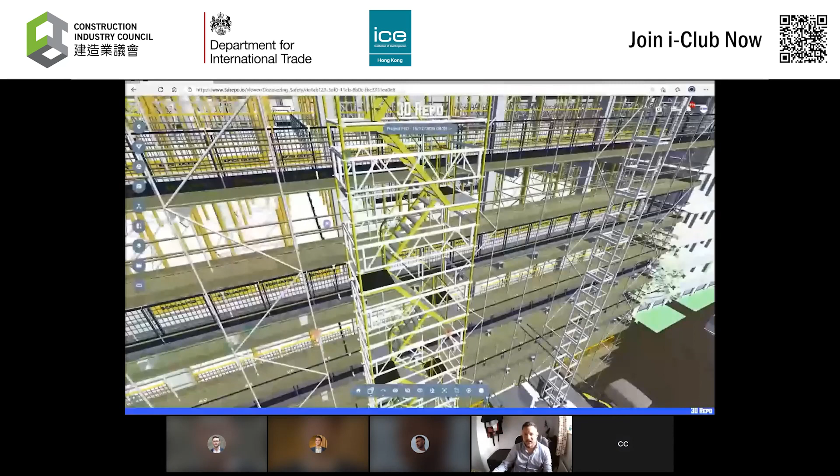It's useful to a degree because we can see in that snapshot some of the risks that might be available, so we could then go and mark those up and assign those to people.

But the bit that really excites us is how we can bring in the timeline, the sequencing, the construction sequence to the project. By having that sequence information, we can go into our new sequences tab, open up the sequence, which takes us back to the start of the project, and start picking dates that we want to move to.

This allows us to see the progress, or how the progress should be at that date, or even the exact time, and things will change.

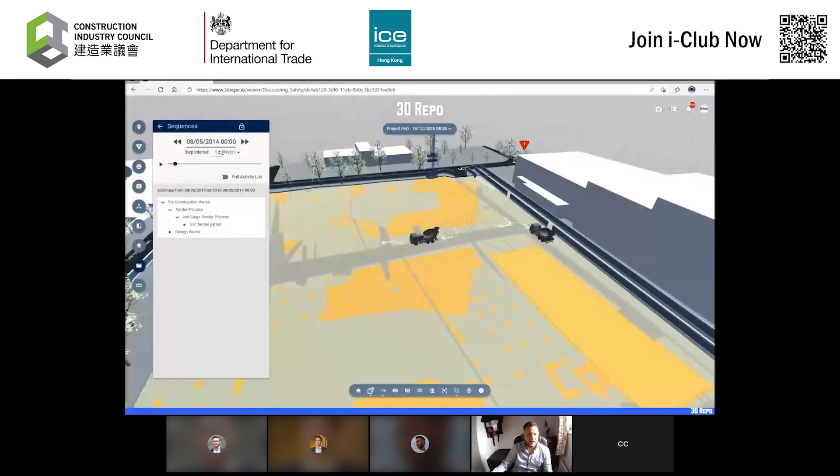Then we can come into the sequencing tool and start to pick a step interval. So here I'm going to say, let me see what happens if I move through this every 6 days. It's going to step through and show me the progress on that project as things progress at 6-day intervals. So here we're going through the design phase, and now we're into the pre-construction, so we can see temporary works starting to come in.

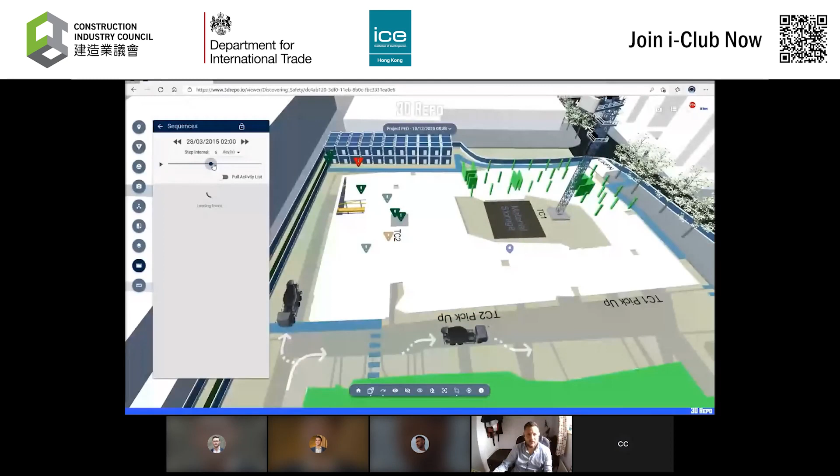We can then stop this at any point and drag and drop through the project just using the scrubber, which is really useful to understand how things are progressing and what risks are being taken.

We've got the list of all the activities that are happening, so I can click on any activity and get the information. This is all coming directly from Synchro, which has probably been linked to your P6, so it's the real planning information, and we can skip between the planned start date and finish date of a particular activity.

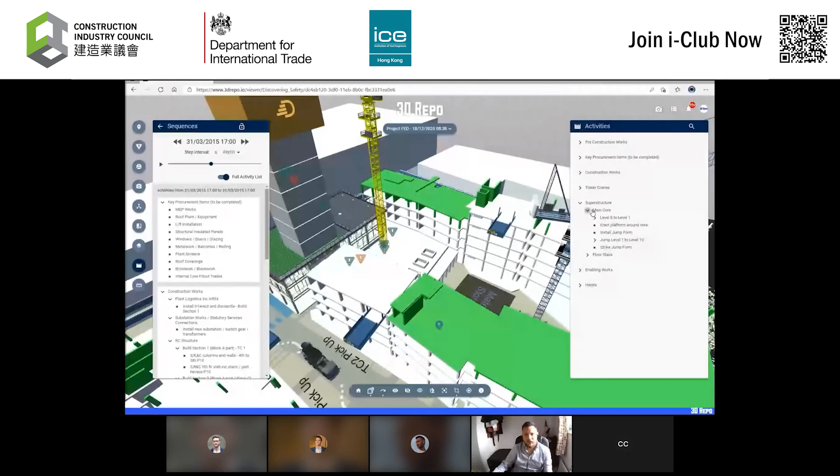We can also get a full list of all the activities on the project. We can search them, look through, say I want to jump to a different level, go to the planned start date of that one, and move through. So we've got access to every activity that's going to happen in the project, and it's all fully linked to our model.

But then what? Because we can obviously do this in a lot of different tools at the moment for review, but where it becomes really powerful is when we start to link it with the SafetiBase tool.

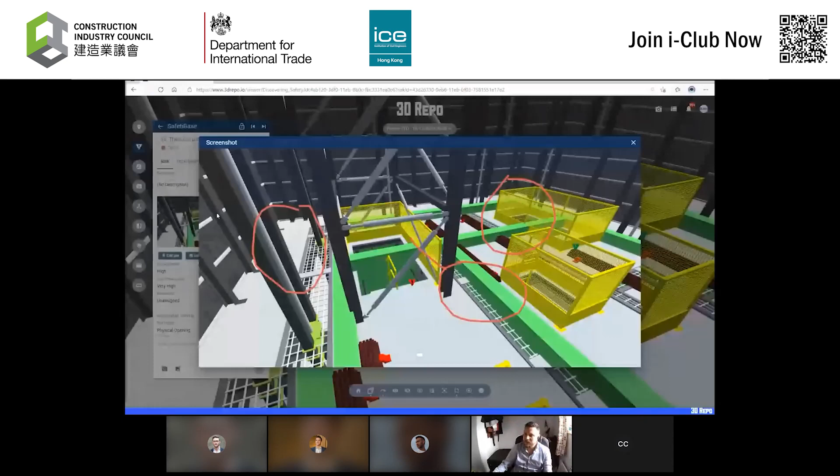If we click on one of these risks, we now have risks that are linked in with the sequence. Our risk understands the time of when that risk is applicable, because a risk or an issue on a project at the construction phase doesn't really exist forever—it exists for the time that that activity is taking place.

So now we've got a full list of risks linked in with the time information, so we can understand when they're applicable and how we can deal with them better. And these can then be assigned to the subcontractor or consultant that's responsible for that particular activity.

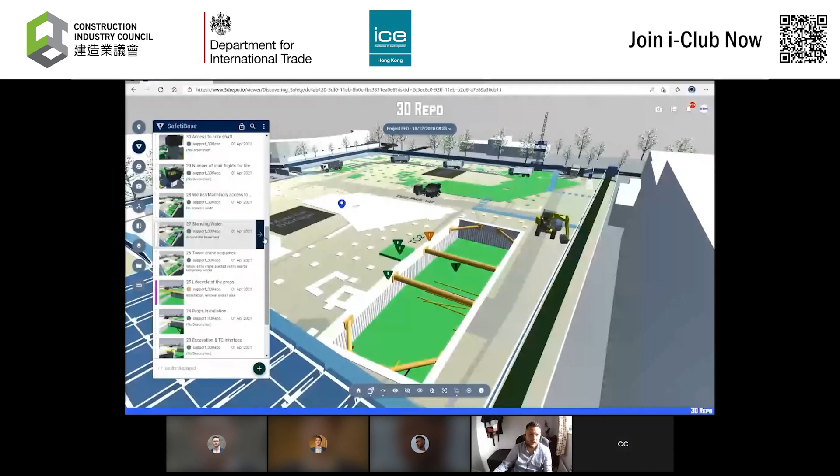So then what? We've got all this information, and we then need to be able to communicate it with people. So I'll move on to linking—again, through our API, we can link out to Power BI or any other reporting tool, but Power BI is our internal tool of choice.

We've just released a model viewer directly for Power BI now, so your 3D models from 3D Repo can be loaded into Power BI and linked to the data you've got coming either from 3D Repo or from an external source.

So here we're linking it to our quality reports, which are coming from a partner product of ours called EviFile, and we can see the quality reports that have been raised against particular elements within the BIM model. This is where the power of the API comes in, because we've got different tools doing different things on the project—we can make sure the best tool for the best job is always being used, and information can flow seamlessly between those products.

So I think that pretty much brings me to the end of my presentation.

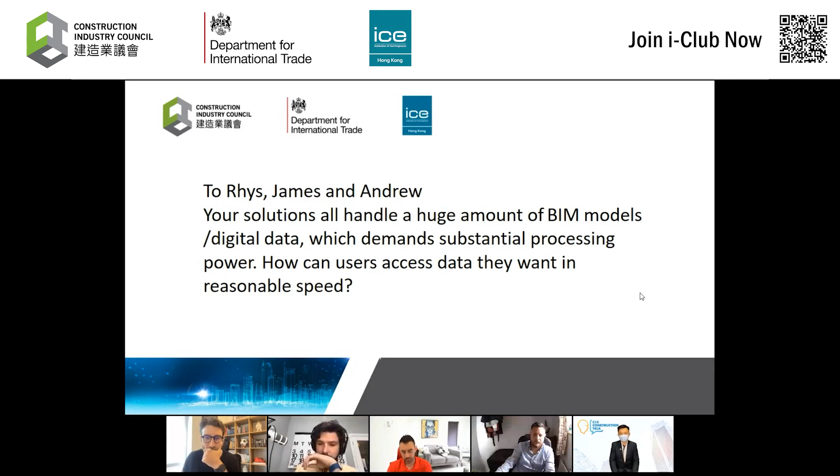I can jump in first if you'd like. I'm based in the UK - it's a thick Welsh accent you can hear. I've been lucky enough to travel the world, but we've grown quite considerably over the last 2 years, so we actually operate a global business, a digital business. We have a team in APAC, we're partnered, like Andrew, with Digital G, so they're on the ground in Hong Kong and Singapore - you can speak to those. We've got a team in America and throughout Europe. So definitely interested to help anybody that can benefit from using our application, regardless of where they are in the world. So yes, we're interested, absolutely.

From a Sensat perspective, almost identical response, except we don't quite have the footprint that Rhys and his team does. We work with Digital G, and they're kind of our representatives over in Hong Kong. Very interested to help and support them. We do have an office in Brazil, which allows us to have extended service operating hours, so we'll be able to cover the majority of service and response requests, but working closely with Digital G to drive the proposition into that territory and market.